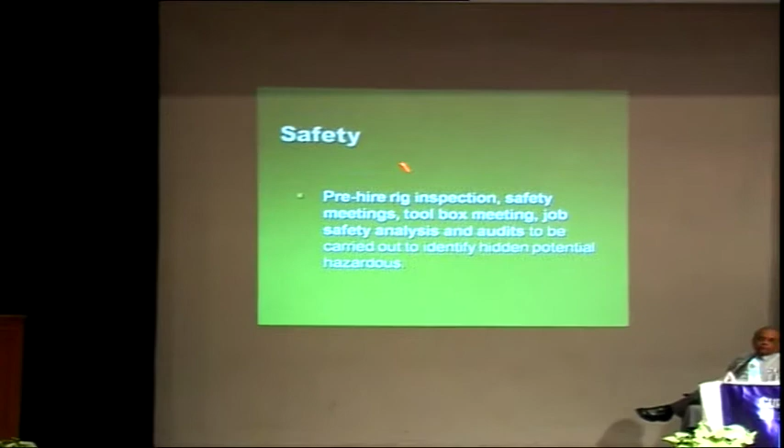Surface facilities are to be installed as per applicable codes and standards, international practices, and applicable local regulation. Safety is the most important part, like pre-hiring inspections, safety meetings, toolbox meetings, and job safety analysis. This is the most important part for this sector.

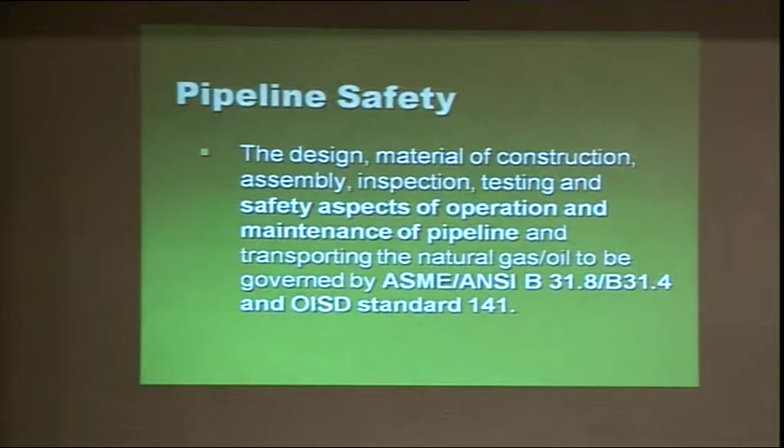Whenever there is oil and gas exploration, there is always a pipeline also to connect with the downstream. So pipeline rules are applicable, and we have to follow OISD guideline 141 or ASME, ANSI B31. All these guidelines already exist, and that's the most important part of the pipeline.

In the pipeline, we generally recommend the SCADA system, intelligent pigging facility, and cathodic protection system. These are the three systems that we recommend.

Now, environmental concerns for the exploration and drilling. The real part starts from here.

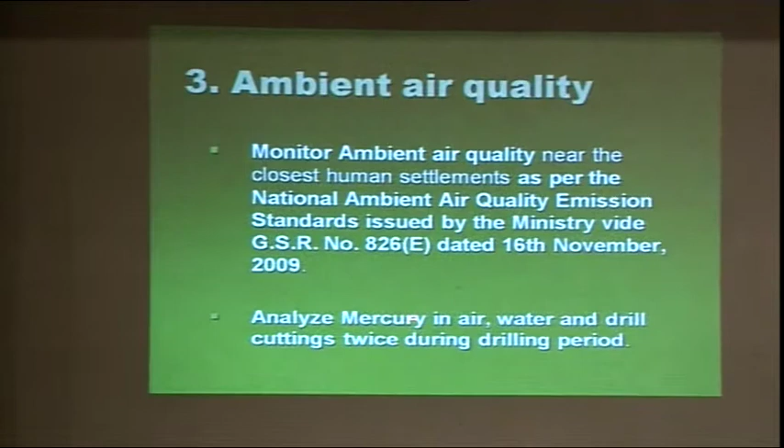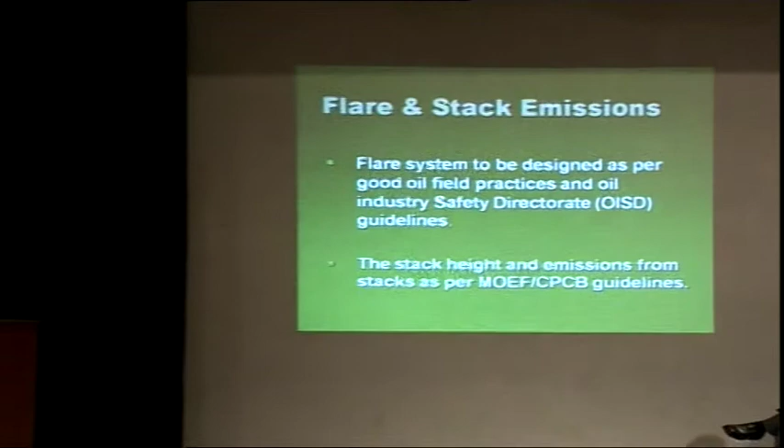Ambient air quality - already communicated in the morning that you have to monitor ambient air quality, and now recently we are emphasizing that you have to analyze mercury in the air, water, and drill cuttings also. Then you have to confirm the standards specified for the DG sets, and the flare system to be designed as per good oil field practices and OISD norms, and stack height should be as per CPCB guidelines.

Just giving a little feel, I will come to this later. There are so many guidelines for flares already available. If you go to the 30th August 2006 notification, you will find all this literature there.

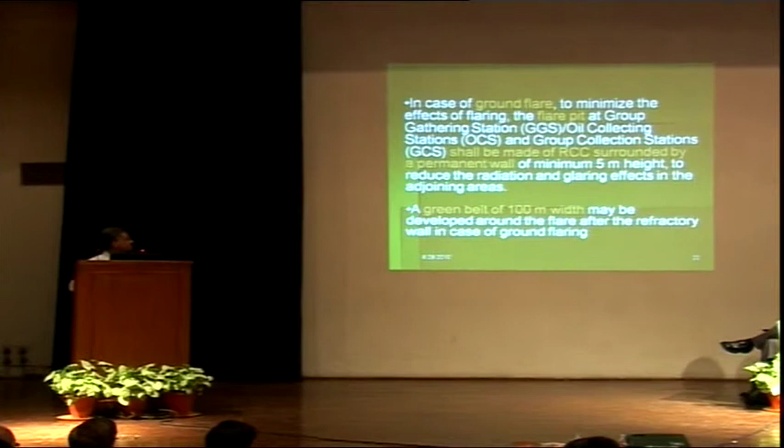Details about the flare system, the green belt fundamental on the on-site projects, and then this thing - elevated flaring or enclosed flaring, and no burning of effluent in the pits. That's the most important part on-site.

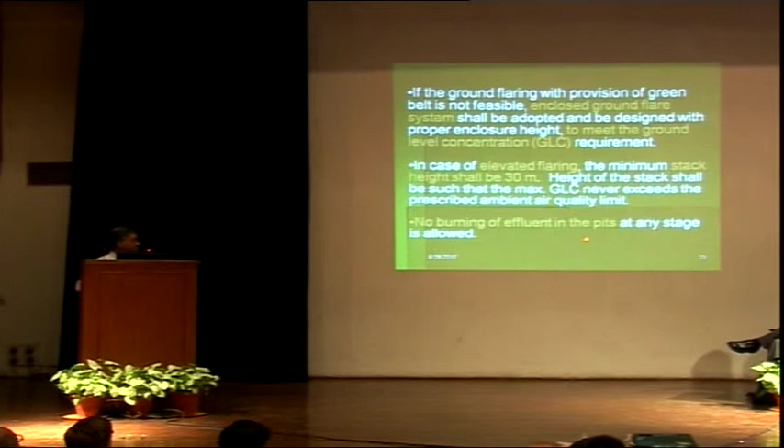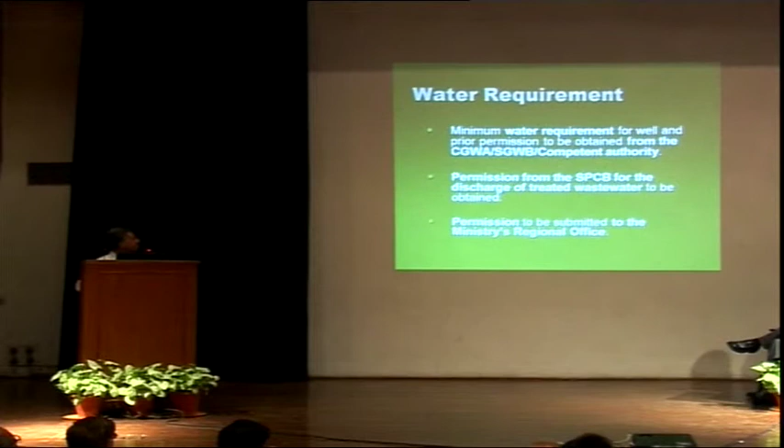Then water requirement - we generally require that you have to have permission for that water requirement, and permission from the SPCB for the discharge of treated effluent. And then there are standards which have been notified.

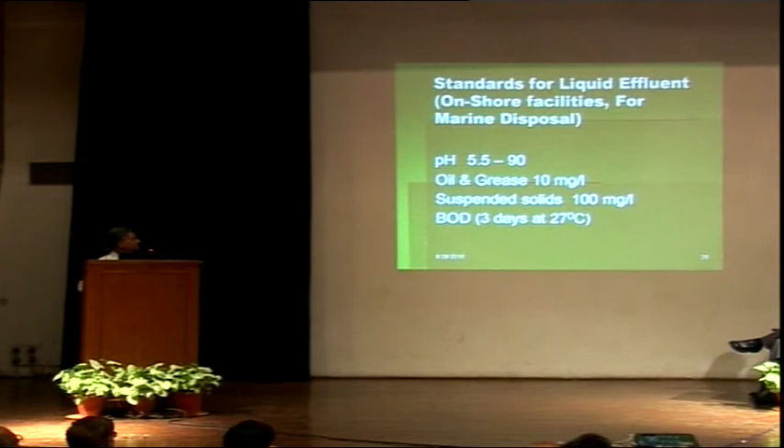This is the important part notified by the Gazette notification: pH, oil and grease, milligram per liter, SS and BOD. The on-shore discharge is covered in the 30th August 2005 notification, and all concerned persons know this, so I don't have to go into much detail or explain anything.

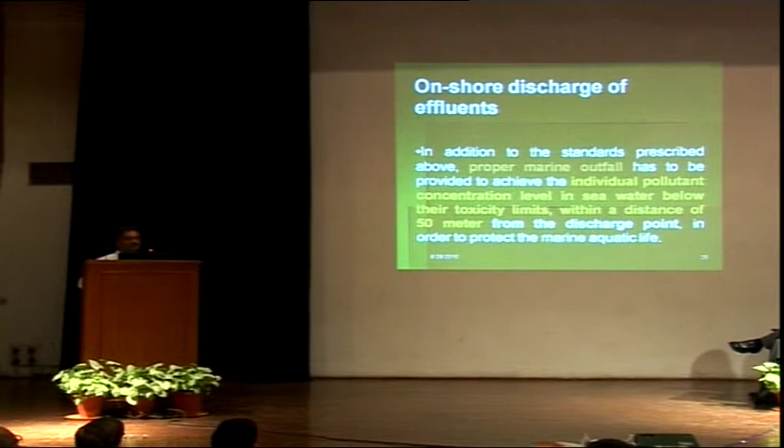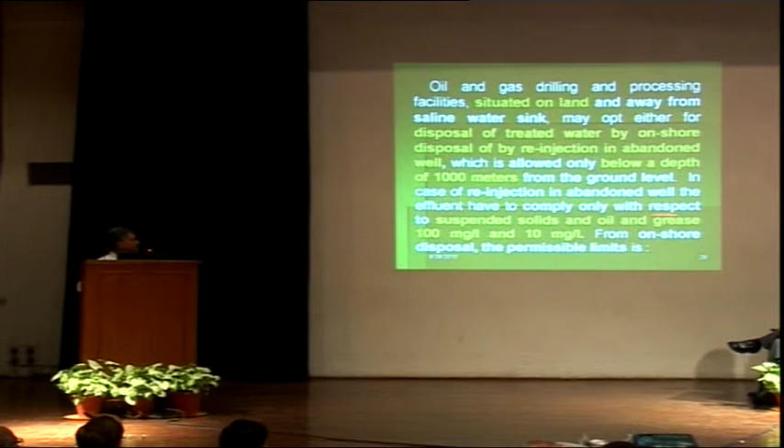We will be discussing these things in the third part - like whether there is any need for change, or whether they are happy with that, or whether there is some problem coming out. That is what we will discuss in the third part.

Similarly for offshore, the oil and gas limit is 40 milligram or 40 ppm. That you have to achieve, and I think in MARPOL it is given as 15 ppm. So we can discuss about that part.

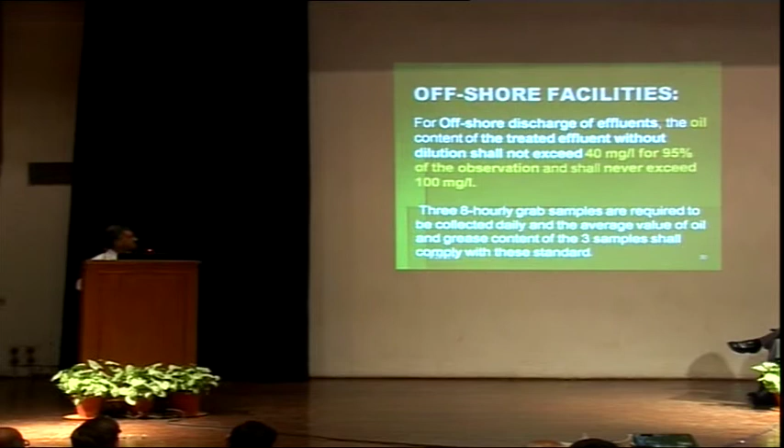And then drill cuttings - we know all that, only water based mud is allowed, diesel based mud is not allowed. All these are given in the notification, so I don't have to go into much detail because operators are here, ONGC is here, everybody concerned is here, and they know very well about all these aspects and what's the requirement of the ministry.

And then comes the oil content limit of same 10 milligram per liter. And low toxicity again should be used - we have given so many options also in that notification.

If not this one, then you can go for this thing, but you have to get permission or approval from the ministry first. You have to inform the ministry if you are going to use oil-based mud or synthetic-based mud, or even if you have some environment-friendly technology, some new technology in mind.

So you can submit that to the ministry, get approval, and we will analyze it, and then we can permit that thing also. Because changing is a must with the time. If you are changing, then it's wonderful. If you are just following the same old 50-year-old rules, that's not applicable. So you have to keep on changing with the time. So there may be something where we have said no, you can't do this thing, but at the same time, we have said yes, you can do it with prior approval from the ministry.

So now barite, mercury and cadmium are there, so you have to be careful. You cannot dispose it off in the sea. You have to take it on-site, treat it, and only then can you dispose it off. And for injection, if that formation water is 1,000 meters deep, then you can dispose it off over there also, no problem at all. And then LC50, the toxic test, you have to carry out to confirm whether they are toxic or not. Only then can you dispose it off.